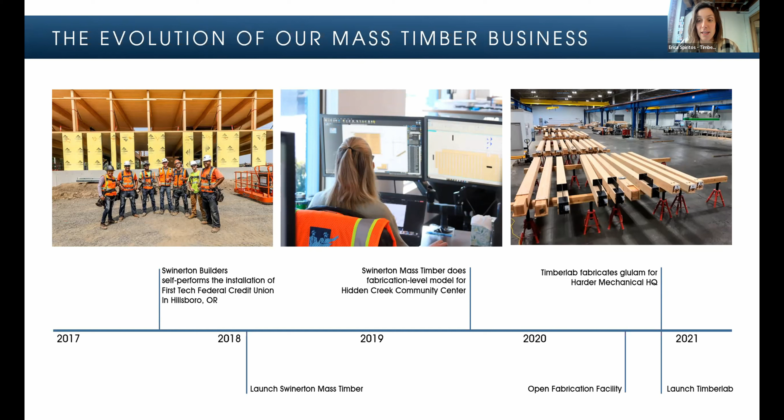So we said, okay, let's try to complement the existing regional manufacturing capacity with a fabrication facility, and we opened that shop just a few months after the pandemic started, so in October of 2020. And we fabricated our first project for the Harder Mechanical headquarters in Portland. And then at the end of that year, we officially launched Timberlab as a separate business entity.

Swinerton and Timberlab have had the great privilege and pleasure of working on a number of mass timber projects. I think this isn't even all of them, but the ones that Timberlab and Swinerton have worked on together. And we've worked in office and commercial buildings, civic buildings, higher education buildings, so many public projects. And then recently embarking on this new market to deliver mid-rise and high-rise mass timber residential buildings as well.

And what I think is interesting here is that public buildings are really a great fit for mass timber because public clients are not pro forma driven. And so they're committed to developing a building that has high community impact and in many cases, low environmental impact, right? And so mass timber checks both of those boxes. And we find that even when clients come to us not thinking about it, mass timber can meet many of the goals that they articulate to us during those first visioning sessions.

So I think one of the things that's just absolutely critical to understand, and what Corey touched on, is early team formation when delivering a mass timber project. And we show here in this graphic 2 different arcs of how one might deliver a project. To maximize benefits, we find it's really helpful to bring on a mass timber trade partner early in the design process, beginning in the schematic design phase. And that's because the majority of the cost driving decisions are made in schematic design. That's when we're thinking about grid layout and column spacing and construction type selection.

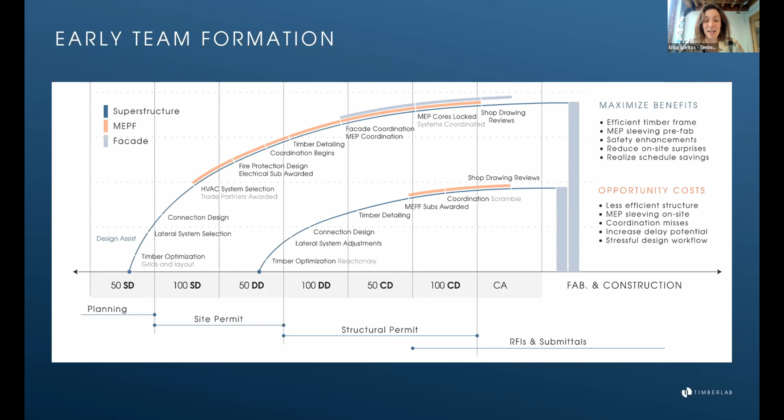And as much as possible, we try to do the fabrication level modeling in parallel with the construction documents phase, and then follow shortly after with fabrication. But this requires just a much earlier decision-making timeline on many fronts. So I just wanted to put that out there for everyone, because we find it's really important to set those expectations early.

So focusing specifically on the mass timber aspect of a project, let's just walk through the process. Design, I think we're all familiar with design, and we're working with an architect and an engineer to develop the mass timber structure, which has, as Corey mentioned, structure, fire protection, and finish functionality, right? And then we take those construction documents, 2D plans, and reconcile them into fabrication level information.

And I use the word reconcile because this fabrication level design process is really a fourth phase of design, where we are taking construction documents to a whole other level, trying to understand the geometry of a building to 1/16th inch precision. And that's not typically the precision that's in the plans at that stage of the project. So it's a big effort.

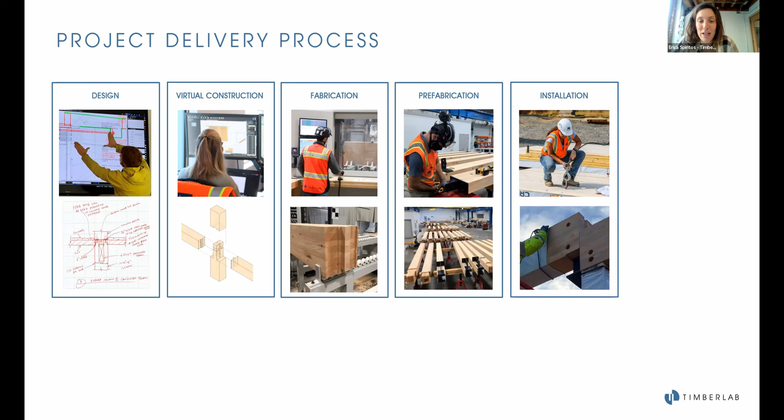It's a collaborative process, but it ultimately feeds into the fabrication process, because we can take that fabrication model and code it for a machine to be able to read, and then send it to our CNC machine, our robot cutting friend, who then custom cuts all of the glulam and CLT elements for the project into their precise geometry. And then we take those custom cut pieces and attach steel connection hardware, wrap every component, ship it to site for installation or assembly.

So let's kind of dissect that whole process a little bit. Design is not so straightforward. When we design a steel or concrete grid, we start with a 30 by 30 grid for a typical office building, for example, and that is just so not what we do for mass timber buildings. In fact, there's so many different ways that one might organize a mass timber structure in one floor plan, or for a particular massing. And the 4 options that I show here for one specific example building are 4 of many that we looked at on this project.

So an 18 by 25 foot grid on the left using double girders, and the double girder gives you a little bit of a shallower beam, so increases your ceiling height, okay? And then an 18 by 25 grid without the double girder, just a single girder. And then what about a 15 by 25 grid? Does that help at all? What about the 20 by 30 grid, reducing the number of interior columns, but now you've got beams running in 2 directions.

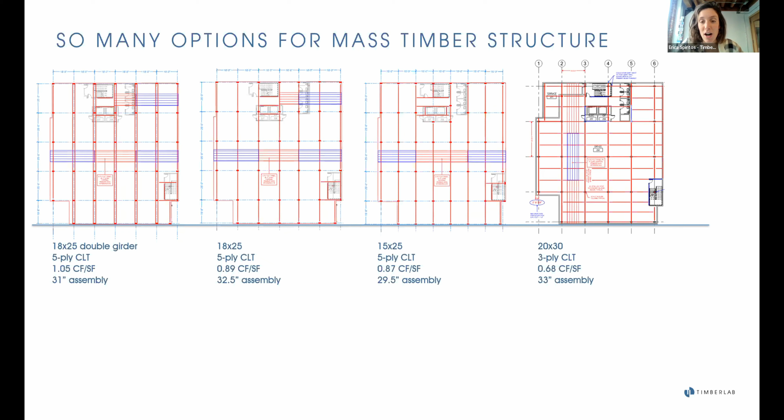And these are the studies that we're doing in schematic design, and one of the reasons why Corey mentions it's helpful to have a construction partner on board early is because having cost and constructability feedback on the direction that's taken with the grid is really helpful in making sure that the project is viable in the long run, and that it meets all the architectural and programmatic and cost goals.

So, okay, we looked at 4 options, but what about this one? So now we've taken all the beams that we saw running north-south in the previous slide, and we say, okay, what if we run them east-west, or left-right across the page? And now we've got no perimeter beam on the long sides of the building. We allow for increased daylight coming in, and maybe if we utilize this double girder system and the primary beams and create a mechanical corridor along the middle of the building coming out of the building core, we have really integrated the mechanical system with the structure in a very elegant way that brings the duct up close to the ceiling, not running underneath a large deep beam.

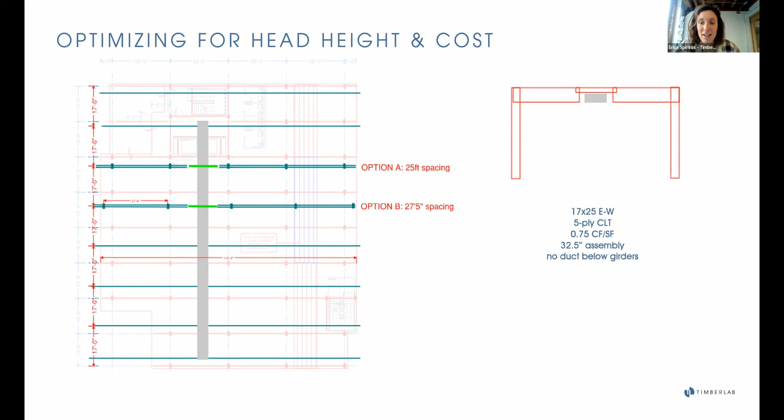So I show you this because this kind of study is absolutely critical, and it takes time, and it's a collaborative effort, and it really is important to understand all the goals of the project. And in this case, the client was really concerned about ceiling height and the number of interior columns in their speculative office project.

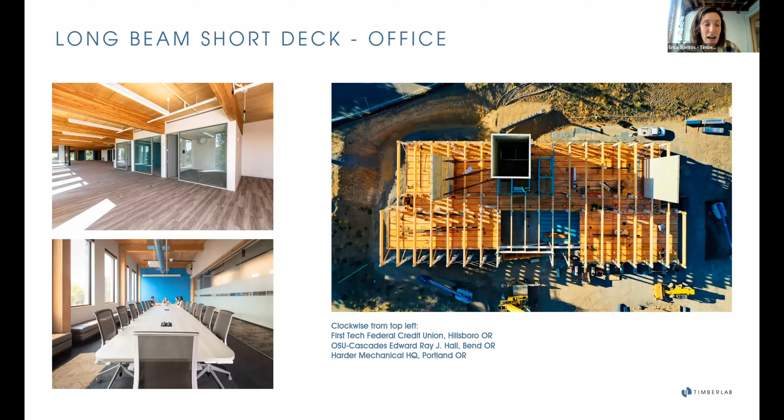Okay, so one-way beam systems are worth exploring, and I kind of talked through that. And this is just an example of a one-way beam system. It's the First Tech Federal Credit Union project that Corey just showed. And these have really great benefits, but it's not the only system that we shared. Some other examples of one-way beam systems and how they fit into a building massing.

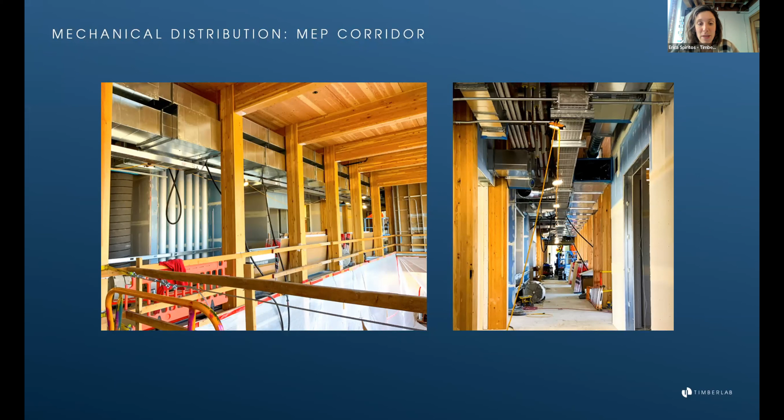But when we're doing this kind of structural layout, as I just showed, we have to think about the mechanical system, and we have to think about how that ductwork, or how that air flows through the building. One way to do that is through a mechanical corridor, which can then easily branch out into the bays on potentially either side of the corridor, without the obstruction of any beam running along that corridor line. So that's a really nice clean solution. Raised access floor is another really great system worth exploring.

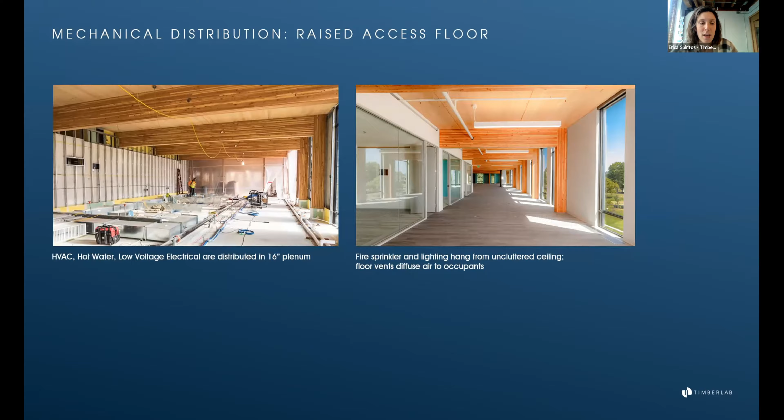And then building services integration is absolutely essential to delivering a high quality, clean, efficient mass timber building. In this case, you're looking at fire sprinklers running through glulam beams and organized in a really clean, elegant way. Same is true for the lighting that you can see in some of these images, all really very premeditated, pre-planned, and coordinated to allow for this uncluttered ceiling aesthetic.

Okay, so now that we have a design concept, we're taking that concept, or we call it design intent, and we start to really drill down into precise locations of building services, equipment, plumbing trees, electrical conduit. And also precise locations of the edge of that deck where the timber sits in relation to other structural elements like a concrete core or a steel brace frame. We're trying to understand the building to precise geometry so that we can custom cut all of the parts, this whole kit of parts. We call that virtual design and construction, but it's really translating the design intent into fabrication level information.

This fourth phase of design, we try to do during the construction documents phase so that we're not adding on additional time during design. And we find that this works pretty well, although it's challenging if we're not ready to make some of these decisions, because typically the need for this information is a little bit ahead of where architects and engineers are in their own process. So there's conversation there, but I would say this is the lead time associated with the mass timber building. Getting to fabrication level geometry takes time.

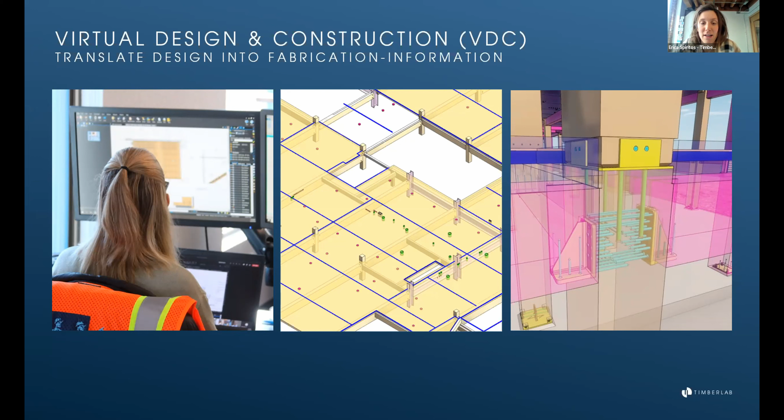So you can see here, Lauren working at the computer. She's trying to understand exact location of all sorts of building services because we can prefabricate or pre-cut all of those holes in the timber factory so that an electrician or a plumber doesn't have to come in, survey the deck, and make the core in the field. And then she's drilling down to look at every single timber to timber component, figuring out how each piece fits together and modeling those components for fabrication, both the timber components and then the steel hardware as well.

The coordination of building services, as I mentioned, is a huge team effort. This is the architect, the engineer, mechanical, electrical, plumbing, fire sprinkler, trade partners, timber trade partner, everyone working together to basically do construction. That's what we're doing. We're building the building. And it's happening in a virtual environment, but that doesn't mean it's any less important that we get it right. And in the past, people are familiar with BIM coordination. That's BIM for clash detection to make sure that in the field we don't have any issues, but it didn't really have much consequence.

Whereas here, this BIM model, building information model, is being used for fabrication. And so it's absolutely imperative that every piece is in the right location, modeled in the right sizing, and that it all meets both architectural intent as well as constructability goals. So I think this is a really often not well understood process, and it's what sets mass timber apart in many ways.

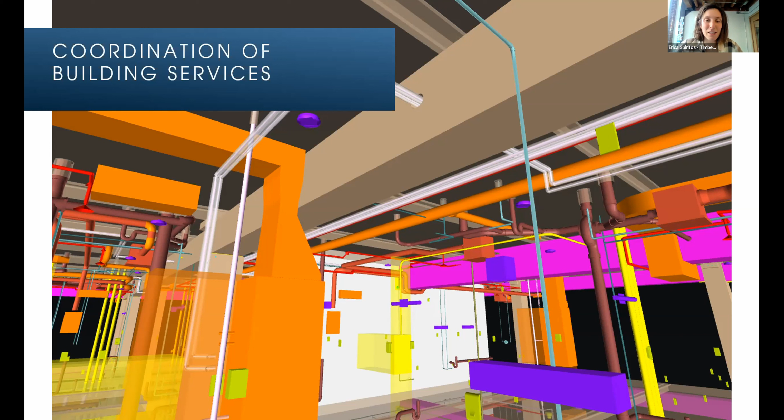Okay, I told everybody that I didn't have too many slides, but apparently I have too many slides. I did want to spend some time talking about what's happening in parallel while we're designing this fabrication level model. And I've seen in the chat a lot of talk about, or questions about, where the wood is coming from. And as you read the chat, it almost appears a little bit antagonistic, and I think very defensive.

And I think the reason we're seeing that, hey Erica, is because, yeah. Do you want to switch to Daniel so you can get some water and kind of see if you're doing okay? I don't want to rush through your program if you need a minute. Thanks so much. I think I'm okay. Okay.

I think the reason why we care so much about where the wood is coming from is because our lives are so intrinsically connected to trees. It was our first shelter, our first tool. Our use of wood for fire is what made it possible for us to eat nourishing food and make our brains grow to the point where we could have this conversation today. It makes sense.

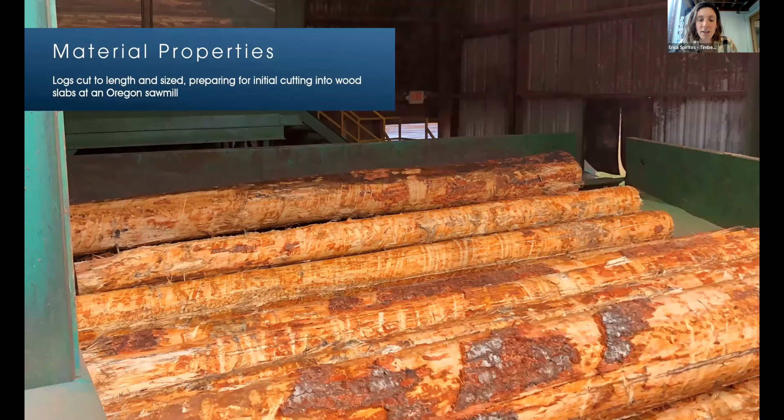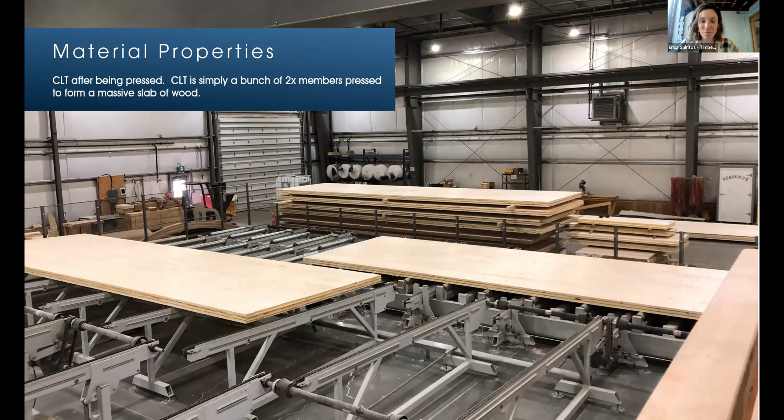Trees are then harvested. They're brought to a sawmill. They're piled high on a log deck. They're run through a sawmill. You can see them being planed into lumber. They're stacked into lifts of lumber, sent to a CLT or glulam manufacturing facility, pressed into, in this case, looks like 5-ply CLT panels, glulam beams glued up into their dimensions needed for the project. All of this material, by the way, is manufactured in a press and then fabricated on a CNC machine.

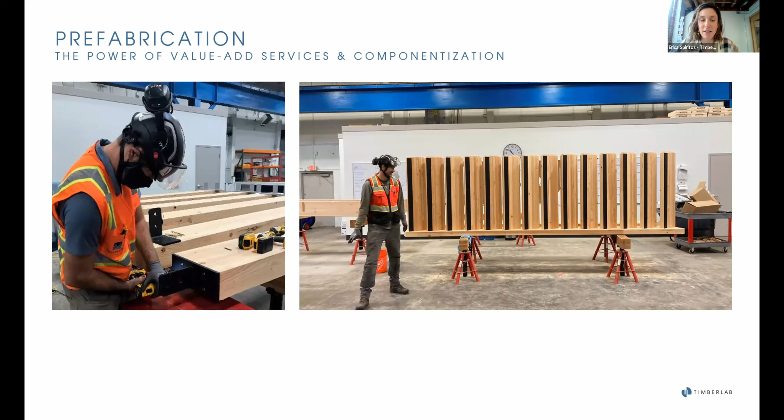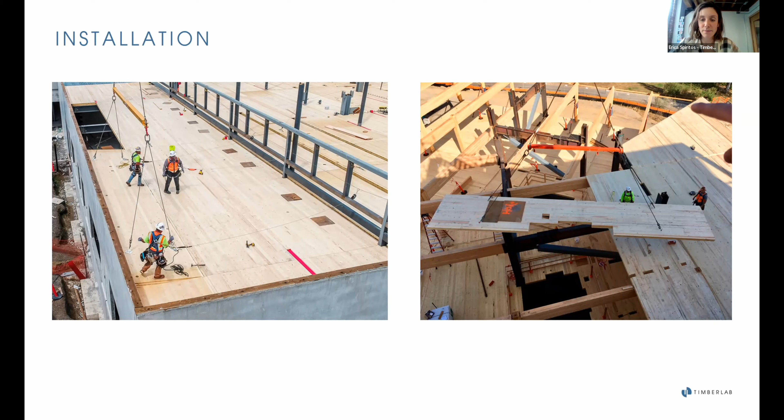And then that prefabrication process that I described is that next step where we're assembling components into a greater level of a value add element for a project. And then lastly, delivering all those materials to a building and lifting them into place, erecting them in their intended location, and fastening them together with typically wood screws, maybe some through bolts, but it's a Lego kit at that point. It's Lincoln Logs. It's a kit of parts assembly that requires safe handling, but all of the hard work has been done by this point to make sure that this structure fits together safely and efficiently. So that's what that installation looks like.

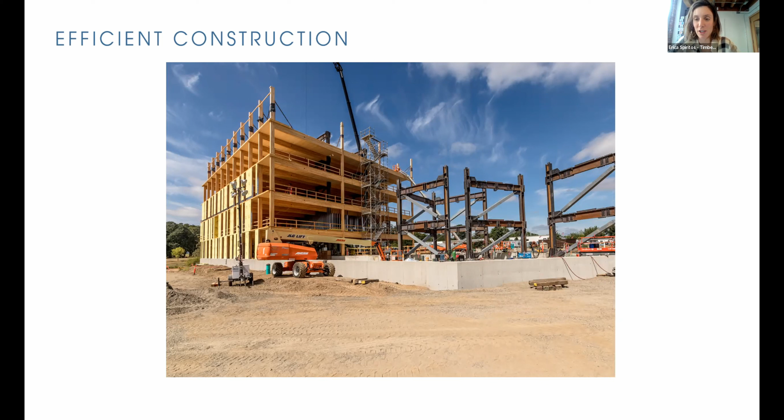And then if you're really thoughtful about construction, you're erecting your facade just 2 stories behind the timber structure, and you're advancing follow-on trade work quickly behind the timber, 1 floor or 2 floors below the timber structure as it's being erected. So when we think about construction schedules and the efficiency opportunity there, it's not just with the timber structure, it's with all the follow-on trades as well. And the reason we were able to achieve the 4-month schedule savings on the first tech project, and on subsequent projects, is because we're looking at early move-in of follow-on trades. And so the overall schedule is compressed significantly, up to 20% in many cases. And then we arrive at a completed building.

So hopefully I've given you a sense of what that process looks like. I apologize for the coughing fit, and glad to take any questions at the appropriate time. So thanks for your attention.